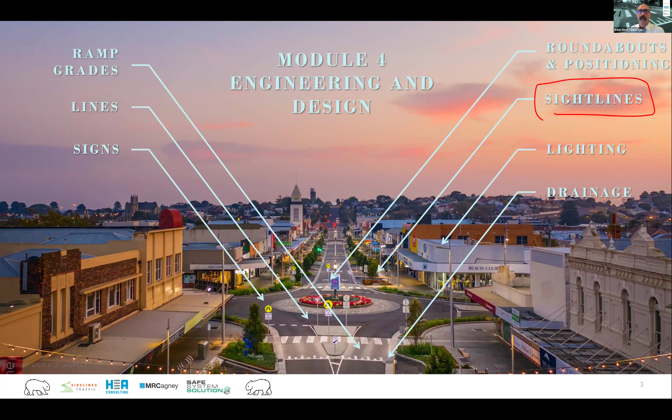Okay, design objectives. We have had wonderful presentations from Hafez, from Bridget, from Prue, that have covered off a lot of the design objectives. So I don't need to delve into that, but it just reminds you that we really need to be thinking about those desire lines for pedestrians, and cyclists as well. Cyclists will move a bit further off desire lines, but pedestrians are really adamant. That's where I want to go. I want to take the shortest and easiest route there.

And we need to design for that. Trying to corral pedestrians like sheep through areas not only is ineffective a lot of the time, it degrades the place value of an area, and also can increase risk. People get trapped on the road because there's a pedestrian fence or something like that. So really good crossings on desire lines, if you are providing specific crossings as opposed to creating whole shared zones or areas without vehicles.

We want to think about all users, and Bridget really delved into that in a lot of detail. We want to have high alignment with safe system principles, and Hafez set a wonderful foundation for that. I'll probably go into a little bit more specifics about some of that, but I think you've got a good foundation for that. And we want to consider this at a network level. Discontinuity through a travel path, one raised crossing and then coming to the next point where you have to cross and then having nothing there, it doesn't present that safe and connected route that we need to think about.

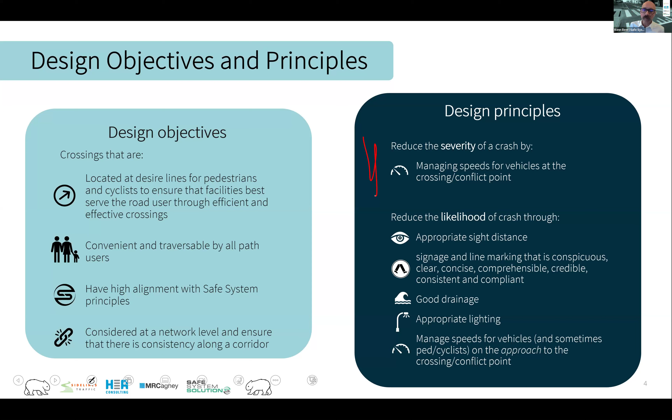So I'm going to start with sight distance. And I mentioned this one, I think is poorly understood, associated with raised crossings. This is one where traffic engineers and road designers are really great usually at doing this for vehicles at intersections. But how to think about it for pedestrians and cyclists crossing either with priority or without priority is not as well understood.

Okay, I'm seeing scary faces, Hafez. And that's good. I mean, it's kind of an obvious one, but we do see a little bit of this. There's a few things to it. Lots of scared people there. Okay, thank you. For those who are scratching their head a little bit and maybe just putting a scared face up because they saw lots of other people do it, let's unpack why we're not so happy with this. Well, there's some good things about it.

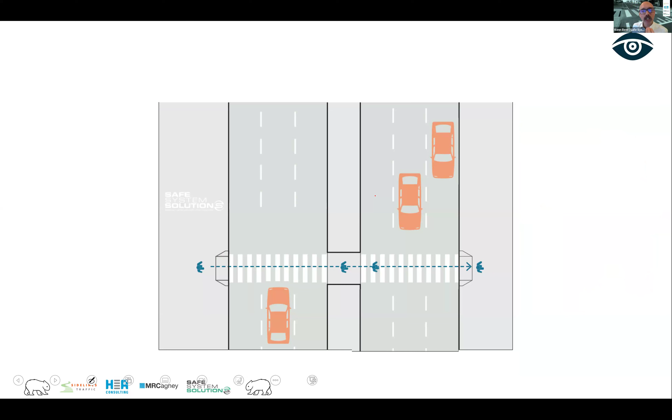I thought I'd use this diagram to explain why two lanes, or even three lanes, approaching a priority pedestrian or cyclist crossing is not ideal. I do this with a little diagram to show you what we call a dynamic visual obstruction, or a moving sightline impediment. It blocks that vision to something - in this case, it's blocking the vision to crossing pedestrians.

Now we have this nasty scenario, and we see this in different crash reports, or we've done some fatal investigations under not that dissimilar circumstances, where this driver is moving in at speed, this one's following just behind, this one slams their brakes on because a pedestrian's moving through quite quickly. This one doesn't have that, and we have that collision happen there. So that's something we're always aware of.

The Australian standard says no pedestrian crossings on two-lane roads. There's some work being done investigating, is that the case? What context are we talking about for that, and other bits and pieces. But let's have a look at a pedestrian crossing on a two-lane road here, which has got a different configuration.

But let's do some thumbs up, thumbs down on this. And Hafez, I see some things coming in there. Was there anything I needed to deal with at this stage?

Well, I think no, people talked about some of the pros and cons of the previous solution, and as you mentioned, we need to acknowledge the good work done, but we need to think about improvement as well. Yeah.

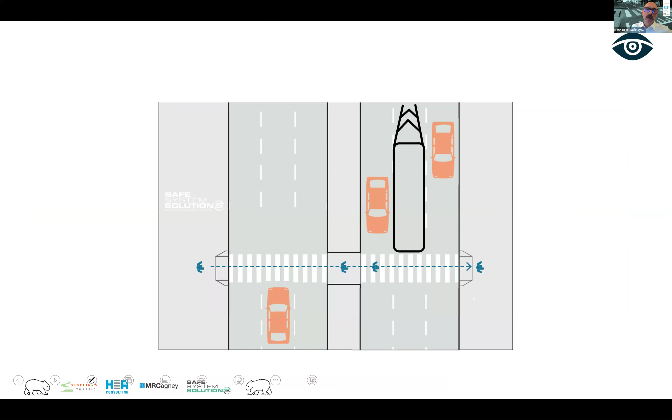Okay, let's talk about some parameters around sight distance at pedestrian crossings, raised crossings, or at grade crossings for that matter.

So the 1.2 meters a second is what we take as walking speed. However, I don't want you to just blindly take 1.2 meters a second on walking speed, because if it's a running track, or like a track that comes straight into the crossing, it's going to be faster than that. This is kind of thinking about pedestrians walking along a sidewalk, a footpath, and turning onto a crossing and the like.

1.6 meter setback is the sort of point we usually say we want to start that real vision to that pedestrian crossing. Now, that's for pedestrians. We'll talk about cyclists in a bit.

In terms of what eye height, we think about eye height for crossing points a lot. We use 1.07 - it's very, very specific. I think they could have just gone with 1, but that's okay. 1.07, and that's thinking about someone in a wheelchair and that eye height, a child as well.

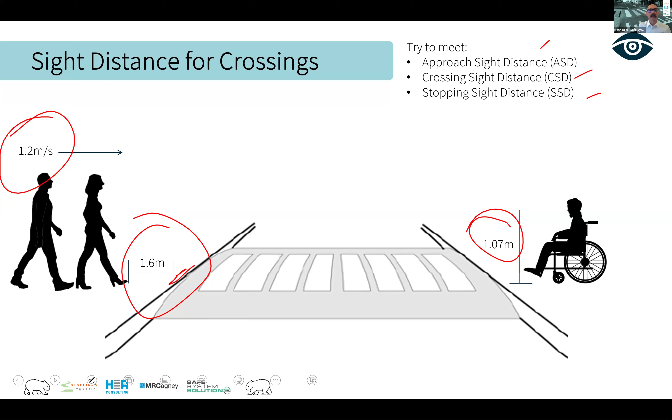A common mistake people make is to simply go to the road rules around parking restriction requirements and say, well, if I meet that, I assume sight distances will be enough. Now this doesn't work at both ends of the scale sometimes. Here I've put in the actual specifics out of the road rules - the Australian road rules, or the standard template road rules, each jurisdiction takes it, but they're all the same for this one. They talk about 20 meters before the crossing and 10 meters after. Now that has been put into road rules associated with sight lines, but it has no context to it whatsoever.

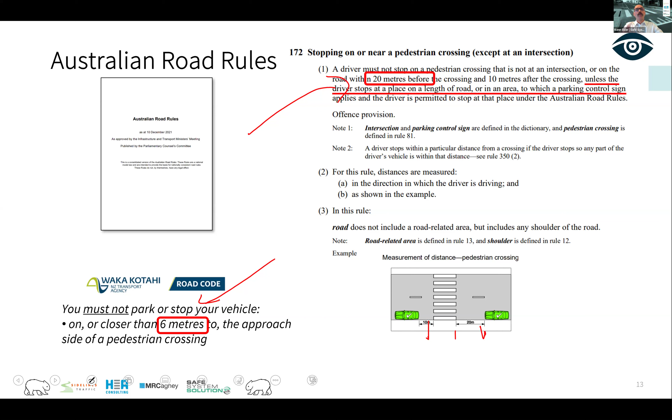New Zealand, for example, in the road code, has a 6 meter one on the approach. So people are making calls on this. But the reason I say this is in some situations, 20 meters is excessive. And if you rigidly stick to, we must get 20 meters here, you actually find that some councils and jurisdictions don't put in pedestrian crossings because they can't remove a car park for one reason or another. So that's not a good thing at all. The other scenario sometimes is the 20 meters is not enough and we're actually causing an issue. So you need to say, okay, that's part of road rule requirements, but we need to understand the principles of this and make our call based on that.

Now, approach sight distance, ASD, is the ability for a driver to see the pavement, the point we need them to. We use approach sight distance for vehicles on the approach to intersections that have to give way or the like, but you use this and you want that driver to be able to see that there is a crossing there. We want them to be able to see the pavement of that crossing. And it's important, the pavement, because if we're thinking about vertical grades, coming over something or the like, we need to be conscious of this.

And you can see there that we've got reaction time as one of the elements to this - that is, how long does it take that driver to realize they got to do something and then lift their foot off the accelerator and put it on the brake. That's reaction time. So we use different times based on the driving environment. On country roads, like driving the Pacific Highway, we have a longer reaction time because people are just sort of cruising and driving. In city spaces, with lots going on, their reaction time is down because they're really part of the driving task at that stage.

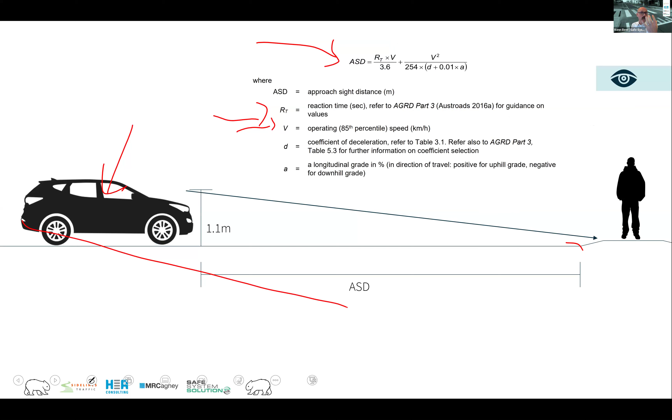Now, Austroads has, in recent times, done something I'm not happy with, and I've told them about that, and they have promised me they are changing it in the next round of the Guide to Road Design, which they're working on. We've had Queensland either come out with or about to come out with the same conclusion that I made, which is this is ridiculous. But I'm going to tell you what it is, and then I'm going to tell you the other way we need to think about it.

Crossing sight distance, CSD, is essentially saying this pedestrian needs to be able to look up there, see a vehicle, and have enough time to make it across the crossing before the vehicle arrives.

Now, the reason we have in the past not used crossing sight distance for pedestrian priority crossings is because who cares how long it takes a pedestrian to get across there? They have priority. It doesn't matter if that's 5 meters or 50 meters. It should not matter.

Austroads' justification on this was that it is a safer situation if we've got crossing sight distance rather than stopping sight distance, which is the next one we'll talk about, because crossing sight distance is going to be longer. This means we'll have this bigger sight line open, a big sight triangle open.

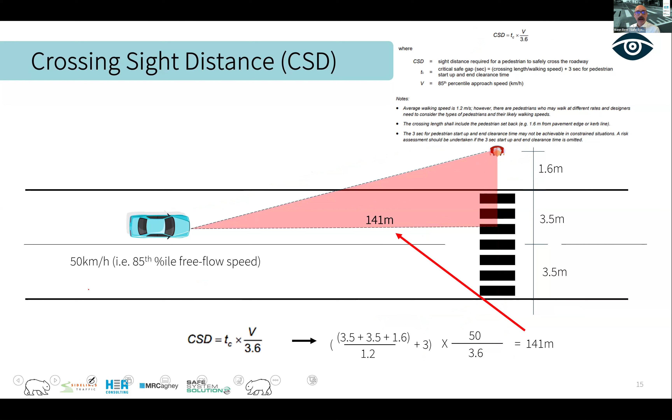Okay, so you calculate that all out, and you get this sort of 141 meter sight distance. So it's huge. Now that's admittedly at a 50-kilometer per hour 85th percentile, but that's what it is. Okay, but if we raise the crossing, what happens?

If we raise the crossing, then what happens? Well, vehicles get in a very different mindset. There is a physical object to now go over. Thus, we get lots of different advantages.

And actually what will happen is the driver will approach the crossing. It doesn't matter if they've seen or not seen a pedestrian - their foot leaves the accelerator and goes onto the brake because they have to navigate over this raised thing, and they slow on the approach to it. That's important. So there is occasionally this misconception that it slows them down somehow. No - they see it, they slow down because they've got to navigate over this thing.

But what we get there then is this interesting thing where they're traveling along at free flow 85th percentile speed, say that's 50. We've designed the crossing with ramp grades to get a 25-kilometer per hour speed over it, for example, and I'll talk to you about how you make those choices and get to those numbers in a bit. But do we then say, okay, let's take this 25 as our 85th percentile speed, or do we still use the 50 as the 85th percentile speed?

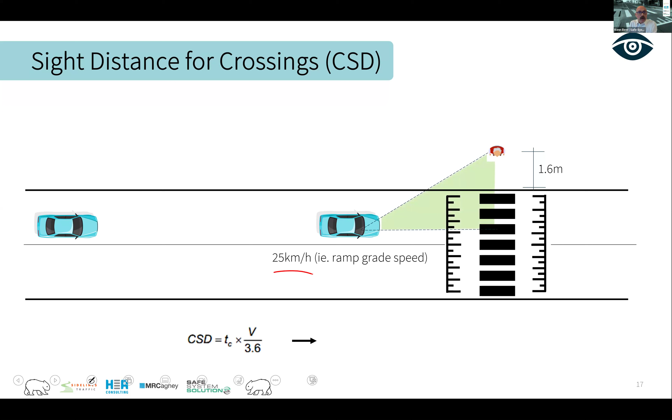This one is going to be much shorter, isn't it? Because we've taken a lower speed. And you can calculate that one out and you get 71 meters in this scenario. I still think that's excessive, by the way, but that's much lower - it's half of what we were talking about before.

So you can see there is an immediate advantage in raising a crossing. Like, before we get into all the safety benefits of raising a crossing, you actually narrow down your sightline possibilities, so that your absolute minimums are going to be far less, which means that if you're constrained with car parking or other things, raising the crossing just becomes a very logical thing to do to improve your sightlines.

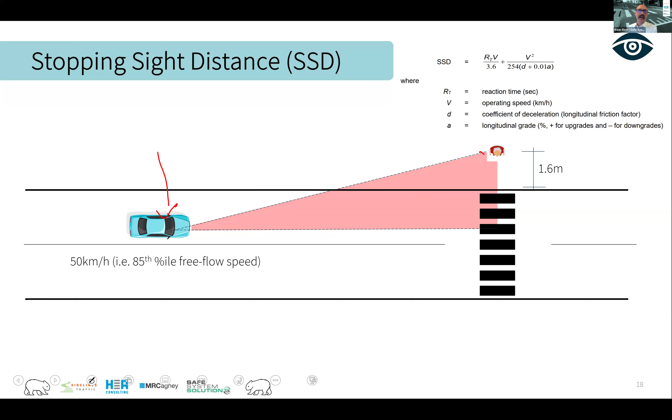Stopping sight distance is actually now for the driver to see the pedestrian at 1.6 meters back and have time to react, lift their foot up, brake, because they realize they're going to have to give way here. That is how sight distance at a crossing should be done, and Austroads will move back to something like this in their next iteration, they promise me.

Because if we run that calculation, we see that same 85th percentile speed is down at 48. That's more like if you actually get out there, measure them, drive them, walk them - this is more appropriate for crossing points. I'm slightly uncomfortable with non-raised crossings with this. So in one sense, raising the crossing just makes all of this far better. But that's stopping sight distance at that number.

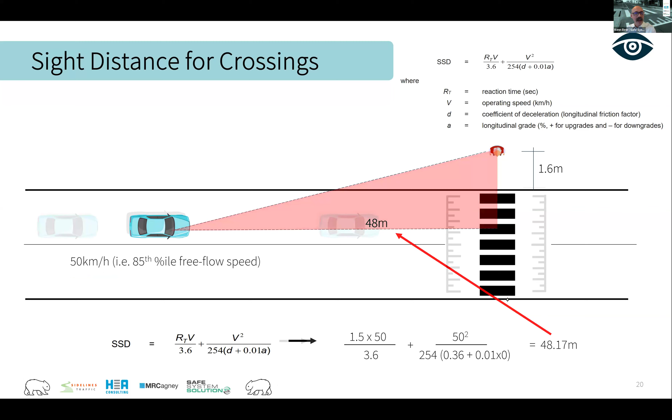Now let's go back - we're still on stopping sight distance here, but I want to explain to you the principles of how this works. We've got stopping sight distance would be 17 when we've raised the crossing. Now that's really quite low.

What actually happens in this scenario is a driver's driving along, say at 50, that's their cruising speed. They're going to hit this ASD point, which is where they can see the crossing. Then they react, lift their foot up, and start their braking scenario. Then they slow, and this does not matter if they are able to see the pedestrian or not - they're going to go through this slowing.

Then there's this critical point. The critical point is where they make that decision: do I continue to brake to a stop, or do I take my foot off the brake and put it back on the accelerator to go over the crossing? So that's your critical point there.

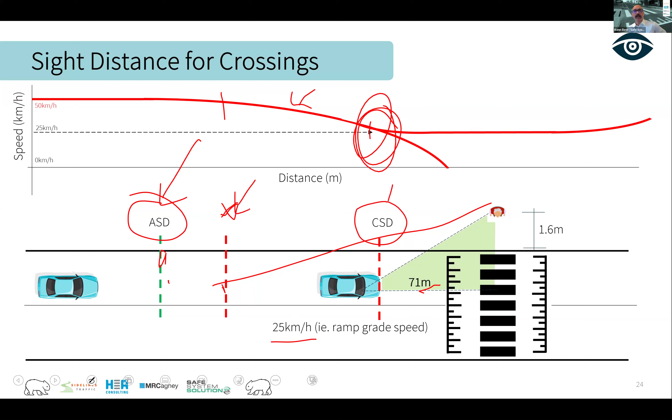So the reality is this is top end design requirements. You need to meet ASD to make sure they know there's a crossing coming up. But do you take the lowest, which is the ramp grade speed, or the free flow 85th percentile speed as the point you draw your sight triangle from? It's somewhere in between those. Think of those as the bookends of your sight distance triangles. In constrained scenarios you might come down all the way to this, and if you've got more space you'll be opening up to this. There'll be a significant difference in these.

Now, where I'm not comfortable going, and in one sense you could theorize this should be the case, is maneuvering sight distance - or gap sight distance, I should say, which is essentially what you'd be doing if you assume every vehicle comes to a stop at a pedestrian crossing. Now, they don't do that - that's just the reality of it. So we will jump past that one.

Now, question for the group - I see some stuff already coming in, which is great, Hafez. If we've got this road and unfortunately can't quite meet our sight distance requirements, either CSD or SSD depending on where Austroads has finally got to, either way, what are some things we might be able to do if we can't quite meet that? What design changes could we make to get us closer to our calculated sight distance requirements?

Any ideas there? And maybe while people pop them in, Hafez, you can tell me. For sure. And then there will be a prize here - the best answer gets a prize. Oh, I like it, I might give out a few depending on how we go. Yes.

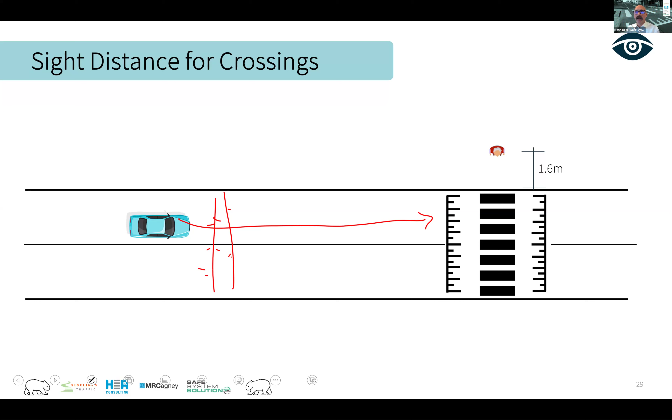Ken has come up with curb extensions. Ken can get a prize for that. Everybody's actually coming up with really good things there, but I think curb extensions is a really important one for us to think about because it just opens sight lines up really well. So curb outstands, curb extensions give us that nice, better sight line there, and you'll have a significant difference.

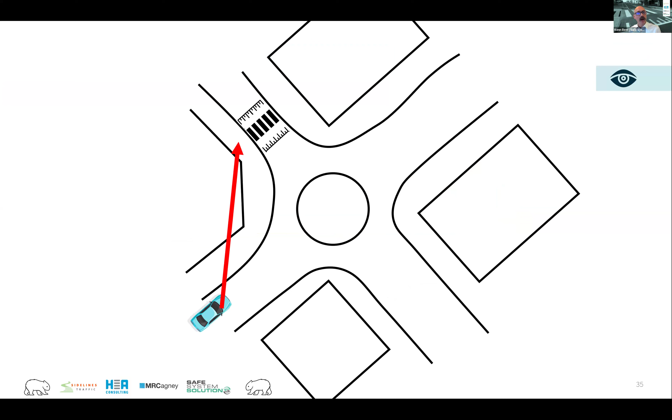Now you want to think about the 85th percentile speed of a vehicle going through the roundabout. Don't take your free flow 85th percentile speed somewhere back here, because that's not relevant when they're in the roundabout slowed down. But one little addition here - okay, they can meet ASD, so that's good. They know there's a crossing, so they're going to be going slower. But if we're able to add raised crossings at these different points, we're ensuring that lowered speed at that critical point. We open up these sight lines.

Ken? Emily has raised this question a couple of times now - I sort of identify with that. Some of the curb outstand, curb extension, some of the facilities for pedestrians interfere with cycling movement and cycle lanes. What are your thoughts on that?

Yeah, that is a legitimate challenge. So an on-road bike often gets squeezed, or can get squeezed, in with vehicles going through, as with the curb outstand. And so you're in these awkward situations. There are designs with cyclist bypass facilities - you need to design them carefully to ensure that cyclists and pedestrians aren't having major conflict issues, but you can sort of pop cyclists essentially behind, a little bit sort of floating bus stop style, but in a slightly different scenario. So there are options there. If you've got the road width, though, you can still provide facilities. I've got some pictures coming up later of where the cycle facility still remains and it's got curb outstands.

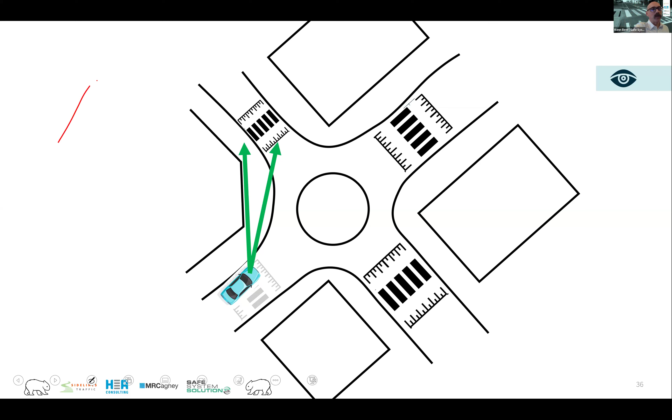And I saw Peter's question there - what's a sharrow? Here's my bike.

So it's a line marking on the road that kind of looks like that. Actually, it's a lot better than that, though. It's just pavement markings to indicate that a bike will be sort of taking the lane at that point. All right, let's have a look at this one.

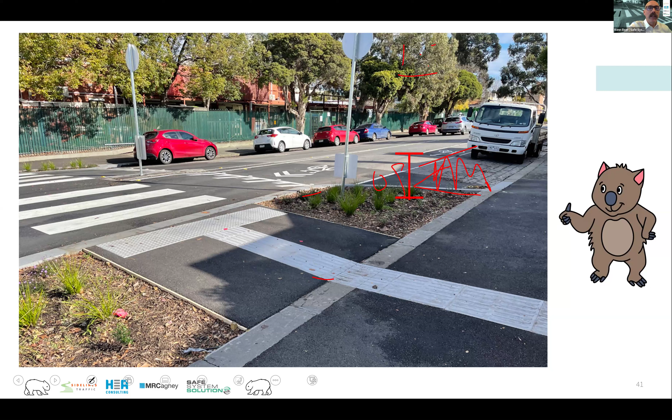But what we want to really ensure is that we have this 0.5 to 1.5 metre zone, ensuring that we have that as a clear window to be able for drivers to see, but also pedestrians to see out.

Now, if you followed the absolute specifics of the guideline, you'd go to 1.07, because remember I showed the wheelchair person and their eye height was at 1.07. But that doesn't make sense. That's thinking about a pedestrian at a non-priority crossing, not a priority crossing, being able to look and pick a gap to scurry across the road. But if you're thinking about a driver approaching, all they're going to see is the top of somebody's head, and that's insufficient.

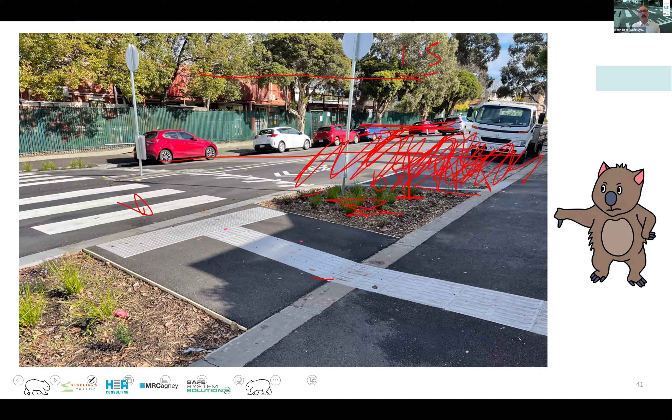So we go down to 0.5 to 1.5 to ensure we've got that low ground cover, ideally. This is a nice example from lovely Warrnambool, where they've done amazing stuff in the CBD with raised crossings around the roundabout, making it really pedestrian friendly and low speed. Nicely done, with beautiful ground cover, but kept low.

The other thing I'll point out, and we've probably got accessibility experts in the group who can talk more about this - I really like that they've provided this hatched area here, because if you put an angle park right up to a pedestrian crossing, people back out over the crossing, which isn't ideal. This means they'll back out into that position instead. They've also got the disabled park there. Somebody mentioned that's the incorrect side for that - I'm not 100% sure, accessibility experts can fill me in on whether that's compliant. But the idea of not having somebody back over a crossing to exit their car park is an important one.

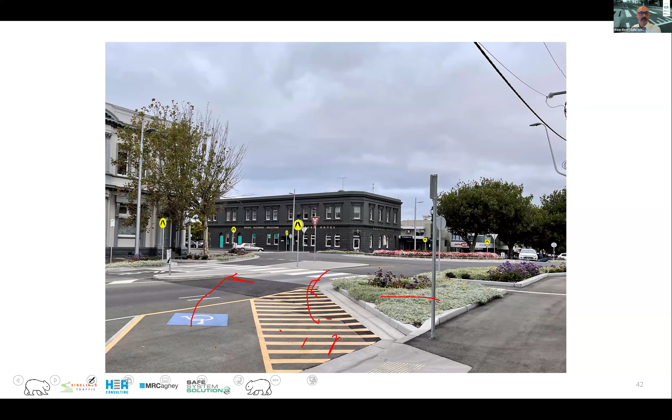Now, what are we, sort of 15 minutes from a break, Hafez? Is that right? Okay, right. I've been talking about...

Pedestrians, 1.2 meters a second walking speed generally we're taking with priority crossing. But what about if a bike has priority crossing? What speed would we use for a bike rider coming in? Because a driver has to be able to see this bike rider and make a call associated with that, and that's determined by the bike rider speed and the vehicle speed. So for bikes, we take a 1.4 meter height when thinking around it. We've got some guesses in on the speed.

Let's give out some prizes - if anybody guessed a speed, they get a prize just for getting involved. There's different speeds from different sources, some nice research I've referenced showing different ones for uphills and downhills, males and females. TMR in Queensland talks about 15 to 25, a 4.1 to 6.9 range, which is in the range people were guessing, which is good. So that gives you a general idea of some of the parameters.

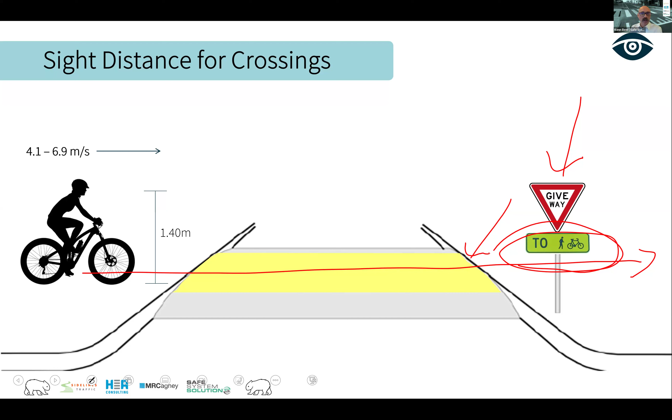So some jurisdictions allow riding on the footpath and riding over pedestrian crossings. So for people saying they may not have seen that before, the case could be that you're allowed to ride in these circumstances. But a lot of jurisdictions are going down this yellow crossing, marked like a road perspective.

There is the other alternate option, which is to provide your cycling facility next to your pedestrian crossing. You can see a couple of them here. We would mark that as the pedestrian crossing. You'd actually technically need to mark it with a give way as well in order to prioritize that cycle way through there. You're getting excessive signage in these circumstances.

People recognize that. But in these scenarios, I want you to ensure that you're getting sight triangles, sight distance to the cyclists. They're going to be the ones that are the most critical because they're moving faster.

So let's have a look at one of these yellow crossings, and you can see that in this scenario, the rider, which is actually me. If you look out here, you're seeing this car, and they come into view there, and they should have enough time to see me and to stop and brake.

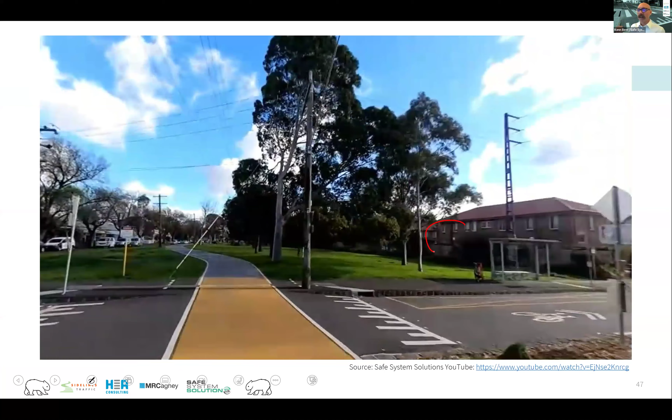But under these scenarios, we actually want to provide enough distance, sightline, for me as the rider to slam on the brakes if that car looks like they have no intention of stopping.

Okay, now there's lots of different guidance out there. I think in this case, the Victorian government has done a really wonderful job in the design principles for raised priority crossings, especially around how they've dealt with sightlines. It's a good document, and I've put a copy into the learning management system for you, but you can certainly just Google this and find it.

But I'm going to take you through the process for looking at sightlines for these priority crossings under this guidance. Some jurisdictions have no guidance whatsoever on this, so it would be appropriate to use this. I'll show you TMR's got a little bit of unclear guidance around exactly what they're thinking on this as well, which would be less than this. Okay, I'll do this, and then I'm going to let you have a quick grab of a coffee or something like that.

So, safe intersection sight distance - we hadn't talked about that one specifically. That is SSD, stopping sight distance, with some slightly different heights you're looking at. So the formulas are the same. But because we're saying okay, this is kind of an intersection, we're going to think about it in that context.

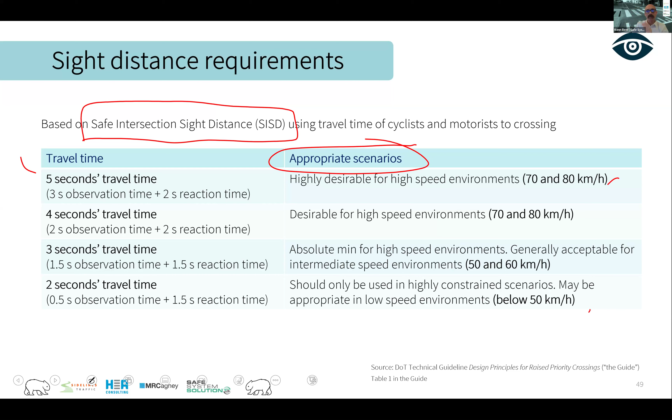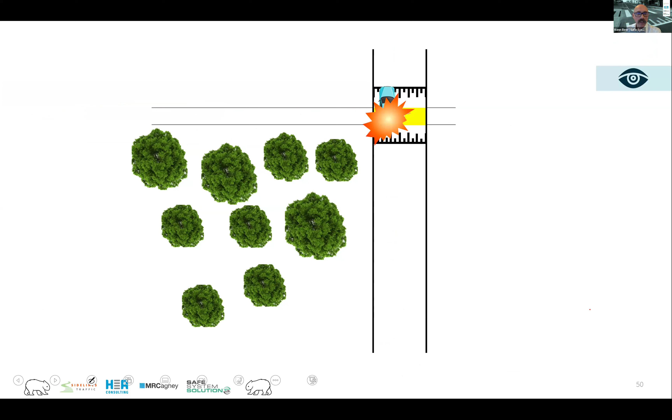So what we're talking about here is we have no sight distance there, and we see the car doesn't have enough time to stop, and even though they slowed down, there's been a collision. If we open up sight lines there, at some point we will have the ability then for the car to come in and the bike goes through, the car saw them in time, slowed down, let them go through. But we also want to try to provide this scenario, which is where the car didn't quite stop, I'm going through, but the bike slams on their brakes because they've realized they're going too fast. So we're providing that genuine multi-sight triangle in these scenarios.

The configurations come in 3 different scenarios that you can analyze out there. Scenario one is like a very square crossing, like the one I showed. But often we have this shared path or cycleway running parallel with a major road.

That's a really good way to do it, especially with major projects about traffic congestion, widening or duplicating a road. They want to pump more vehicles through it. This is our opportunity to ensure we're providing dedicated facilities for pedestrians and cyclists, and we can leverage off that. So we create this running parallel within the road reserve, within the right-of-way. We have this dedicated facility.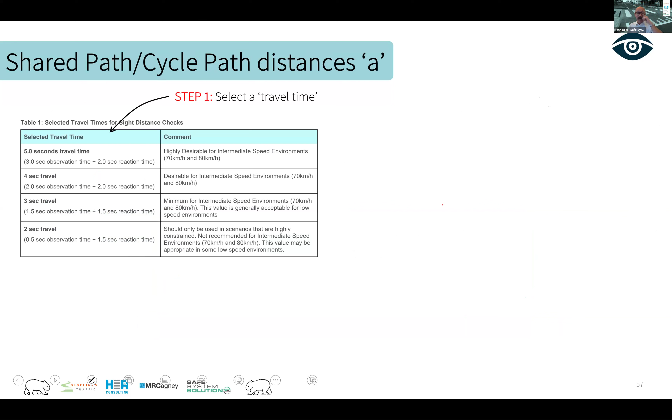So there's your 3 scenarios to work through. You use the same formulas, just thinking about different specifics. To calculate distance A, the bike setback, we think about our speed scenario - the travel time scenario, land use scenario. So we pick one of those: is it a lower speed environment, and we can take a low travel time speed?

Then we move to our choice on the speed of the cyclist - I talked about that, 30 km/h for a cycleway, they're hammering through there. Down to 15 where cyclists are really navigating around this area. What we do then is look for A, basing it on what we've chosen as a cycle speed and the road environment, and then find your corresponding distance for A.

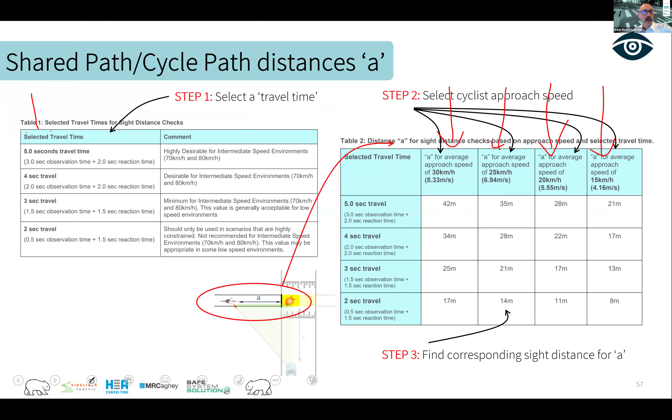The distance for B uses the same principles, and we're talking about the main road operating speed here. This could be an 80 km/h road - they're hammering along, they've got to slow down and make their turn. How far back do we need to make sure they can see cyclists? We use the same thing: we go 80, and then the travel time choice from table 1, and you pick your corresponding travel time, for example.

And then C is similar. So you can see here a quick table on this. If we've taken a 20 km shared use path, as somebody did nicely earlier on, and we've decided on a 3-second travel time requirement, and there's a 50 km/h operating speed of vehicles, you can see we want to provide 17 meters for A and 21 meters for C.

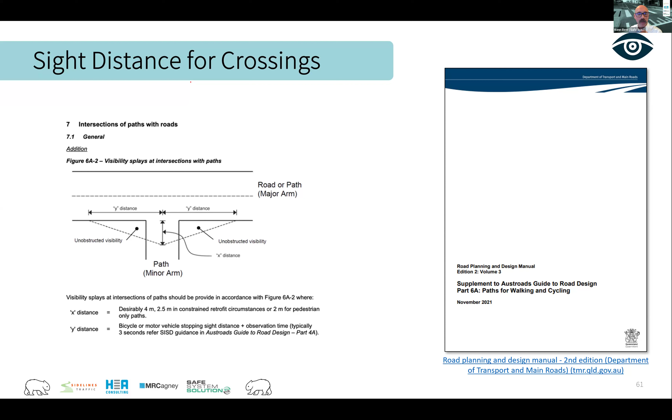Okay, I'm going to keep going, but we've come up with some calculations on these sight distances and the like, and I'm just going to jump in here and show you the TMR supplement to 6A, Paths for Walking and Cycling. Have a look at that with some of those slightly different scenarios, I talk about a 4 meter setback there, not quite the same exact scenarios, but that's your reference document if you're in Queensland, taking into account the principles we talked about.

But my question here is, what if you cannot get those sight triangles? We talked a little bit about this for pedestrian crossings. I'm now in the shared path or cycleway crossing scenario. Is it just all the same things, or is there anything else that anybody can think of? Let's see if anybody pops something into the chat there as we get back into it after our little break. Any ideas, people? What can we do if we can't meet the sightline requirements on the approach to a shared path crossing?

Cool, okay, now we're getting some good answers coming in, aren't we? What do we got there? Tom's saying, again, you might want to start questioning the crossing control. And we've got traffic calming, so make them stop and see. I assume we're talking there about the bike, so we would be talking about changed priority there, or we might be even talking about making the vehicle stop and see, which is another option. Oh good, lots of great stuff coming in.

Fez, I'll let you decide who gets prizes here because this is all good. I've popped a few in, I think some others people are popping in could be added as well. Speed management for the cars.

Okay, so let's talk about positioning of raised crossings around roundabouts. I talked a little bit about that. Really, you've got two options here. One option is to have your crossing right up at the hold line, as you can see in this one - right up at the hold line you've got the raised crossing. The second option is to sort of set it back maybe 4 or 5 to 8 meters, as you can see here.

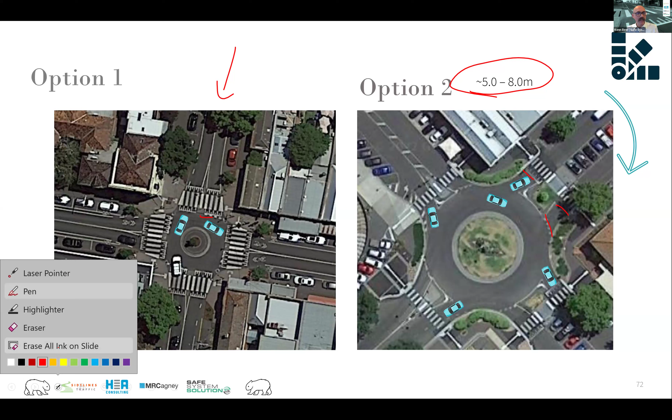You've got that buffer. The scenario I've laid on there is around vehicles entering into the roundabout. In this scenario, we have vehicles that are waiting for pedestrians and they're clogging the circulating carriageway. Personally, I don't care, and the reason is that this is obviously a high pedestrian priority area - moving vehicles through there at speed is not the purpose of that area. Yes, this scenario means they'll be able to wait there and still circulate around, so it's a bit more efficient for traffic flow. But actually, the reason I prefer number two is not to do with that.

It's actually to do with vehicles entering the roundabout. If they are waiting for their opportunity to come in, under this scenario they sit right over the pedestrian crossing. It's not the most risky thing, but we do have pedestrians walking around, going down, up, and certainly mobility challenged pedestrians are very much stuck there waiting. So that's the reason I say this is the preferred option, because we have that area where most vehicles can just prop out of the way. The next vehicle will prop back, and there's that clear pathway for pedestrians to cross.

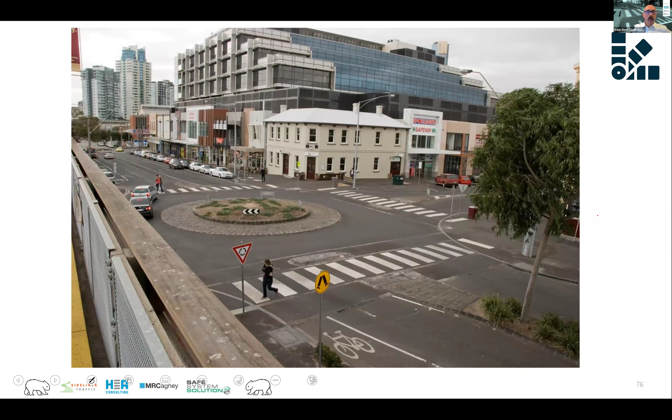Okay, the next thing I want to briefly mention is the angle of approach on any raised feature on the network. We really want to try and provide that perpendicular right angle, so any larger vehicle navigating over this doesn't hit it with one wheel first, go up, and get that rocking destabilization. That's our objective, and that's why we try to keep everything as square as we possibly can.

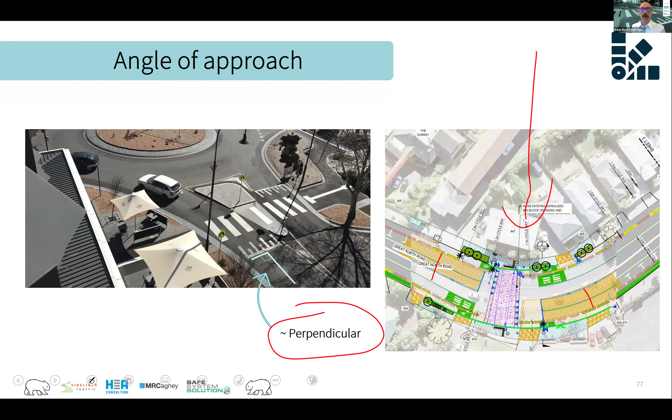So the ideas in there are good. Either we're going to try and slow vehicles back here where it's perpendicular to travel, or we alter things. So one proposal was a flared crossing, which is fine. The raised part doesn't need to run exactly parallel with the crossing lines. So that's a possibility, or something setting it back, bringing it back, or particular raised points there.

The principle, again, think about the principle. The principle is to lower speeds at the conflict point. Make sure vehicles are going at low speed where they're about to hit a pedestrian. Try and do it on as much of a perpendicular angle as you can.

Positioning at roundabouts, again, different guidance. The Victorian guidance on bicycle and pedestrian treatments at roundabouts is a reasonable document. It's getting a little long in the tooth now, but still some good stuff in there. TMR's got some good stuff too, but you have to jump between 4 documents to get it all. I've put those 4 in the notes so you can jump in and have a look yourself.

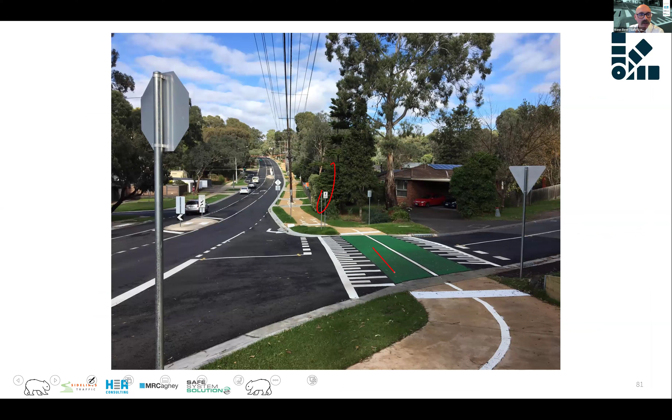Another example here. This one you see is a cycleway, although is it marked as a shared path? It is marked as a shared path, so technically that should be yellow. You can see the setback is going to be good for vehicles exiting and entering. There you go, I drive a little car in there. You can see they're propped out of the way. If they're doing that right turn in, they can pause and not be impacted by vehicles coming this way. So it's a nice little buffer area.

All right, ramp grades, how are we going? I'm going to have to move a bit quicker here. There's Fez and I out there measuring some ramp grades down in Caulfield. That was good. But here's the basic principles: the harsher the ramp, the more people slow down for it. Because they sit - harsh ramp, slower speed; gentle ramp, faster speed. Pretty obvious, but as I said before, important thing to remember is they're making their decision back here.

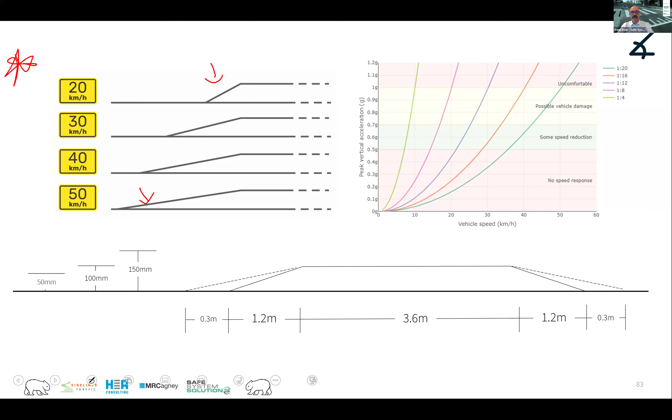They don't hit it and then make a decision on the speed to go through. They make a call based on what they can see, what they're perceiving, what the advisory speed says, and importantly, their history of driving that point, because most drivers have driven this road before - the bulk of drivers. If we've signed something very shallow, easily shallow down at 25, it may be the first time they do it they'll go down to 25. Certainly not the next time.

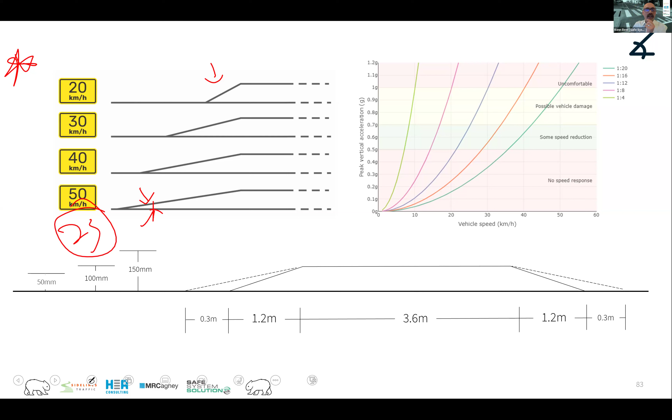So what we talk about there is ramp grades, and we talk about it in a 1 in something. So here we've got a 100 mil high ramp, 100 mil high platform, 1.2 meter length. Quick prize for the person who can tell me what's the ramp grade there - pop that into the chat. A 3.6 meter length of platform. This is a very standard raised crossing.

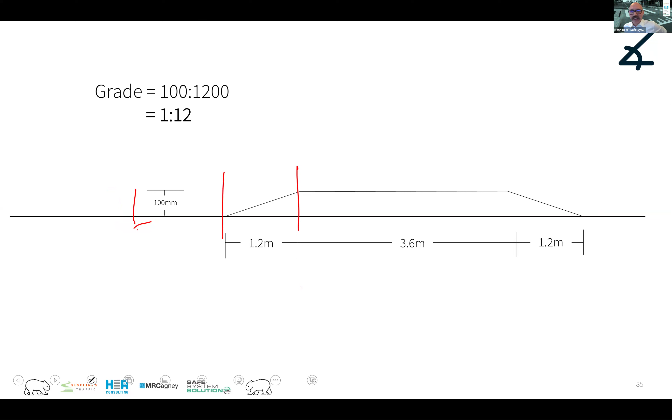Who got 1 to 12 first there? Andrew. Andrew got it, Gold Coast Legends. So that's going up 100 and out 1200, right? So that's what we talk about with ramp grade there. Tough field, yeah. But I want you to remember ramp grade is relative to the longitudinal grade of the road, so you've got to keep that in mind.

Here's a wonderful graph, CDM research graph, and it's certainly used by a lot of the decision making. We've got different ramp grades here, and vertical acceleration - that's how much up and down the driver's going to get. No speed response for this area. Now, uncomfortable is an understatement here - this is almost really bad, possible vehicle damage, you can see it sits under that. This is where we want to be. This is where it will play out, what they will settle themselves very quickly at in terms of the speed they travel through these crossings.

So what you do is work out what you're looking for, and you can get a ramp grade accordingly. So 1 in 12, we can see is going to take that trajectory, isn't it? And we can say there, okay, we're going to get somewhere in the 23, 24-ish, 25-ish range. So it gives you that nice ability to understand what speed we're going to get through based on the ramp grade.

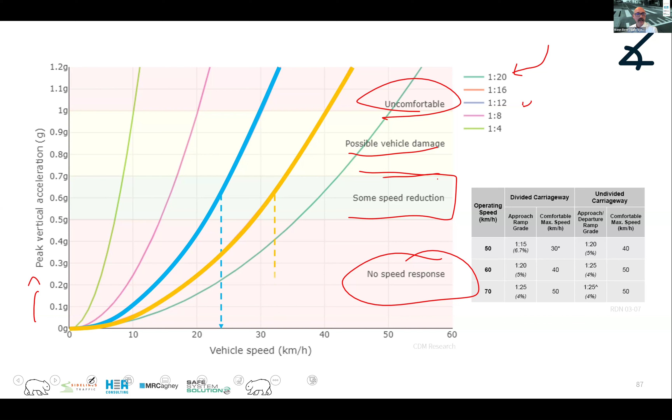If we took 1 in 16, we'd be thinking, okay, it'll be a little bit above 30.

Now, lots of different things in different guides and points about it. So I've just listed all this, the Austroads stuff, the Australian standard stuff, talking about heights, lengths, and the like. That's in your notes for reference if you want to dig into these in more detail. I'll put the TMR stuff, the Waka Kotahi NZTA stuff in there as well for you. So I've just dot pointed all of these references. They generally, there's a general consistency, but a few anomalies within there.

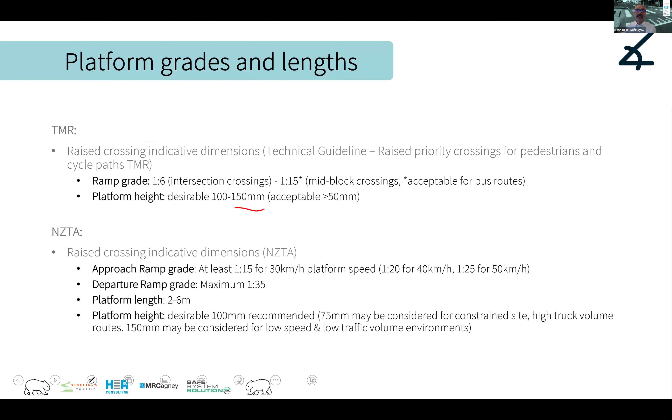It's quite blow my mind - a 150 mil high one that's high. I'd be really interested to see actually some of those out there in different road environments.

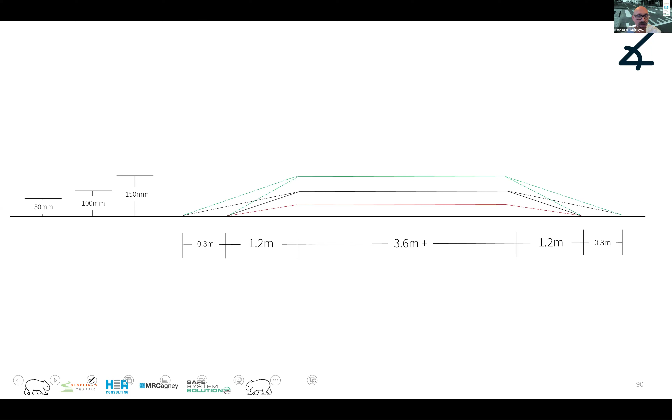But let me explain why that is. You've got a 100 mil, which is a pretty stock standard height. You could lengthen your ramps as one thing. You could raise it, as we talked about, and you could vary the length raising it. So these are going to change all of the ramp grades. You could have lower ones with different ramp grades.

But what we're thinking about is: is a car going to hit its front end as it comes in? Is it going to bottom out as it goes over the top? Is its tail overhang going to scrape as it comes down? So they're all factors of consideration that we take into account.

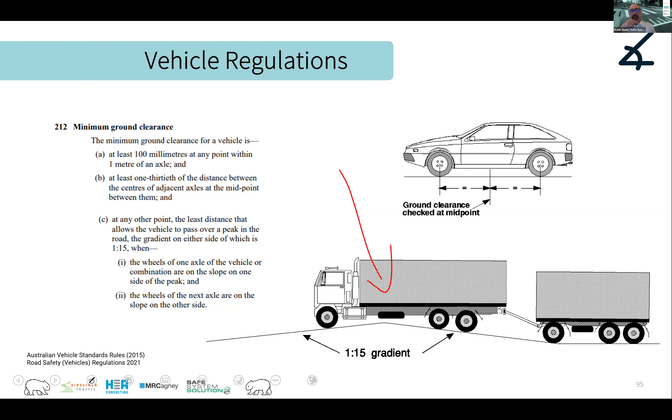Usually cars perform pretty okay in most of them. What we often really need to think about are our larger vehicles and their clearance. Now, we know vehicle regulation, ADRs, and they're based on us understanding some specifics around a vehicle.

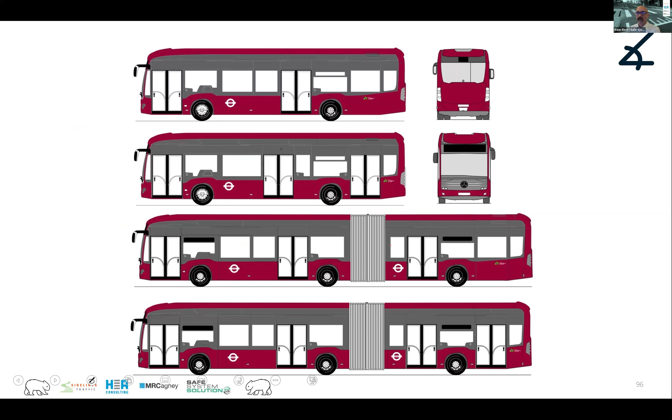Buses become a very important one and something that people get very concerned about. And I often see people deciding, no, we can't do a raised crossing because it's on a bus route. No, that's not true. You might need to design it slightly differently, but you certainly can do raised crossings on bus routes in every jurisdiction.

Let me talk you through the buses though. And this actually links with the heavy vehicle diagram I had before that I didn't spend any time on. What we're thinking about are the distance between axles and the maximum percentage of grade that can be taken. And then you see it's a similar one at the back here.

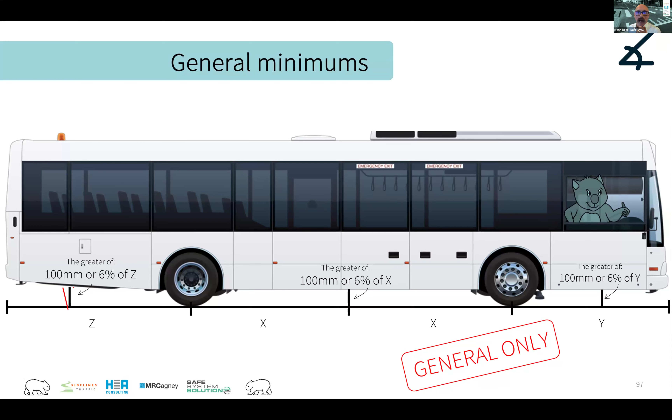Often buses will sit up, taper up on the back as they do. So if you took a standard bus length, 12.5, they usually have that 190 clearance. These are some New South Wales specific diagrams, but you see angle approaches and front clearances are important. And you've got wheelbase as another important one.

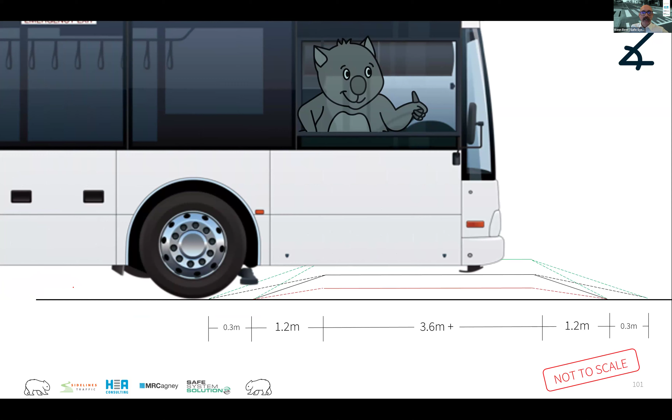We can think about long rigids. We can think about articulated buses and their ability to tweak. But essentially, if we take some of the worst bus scenarios being a coach - your public buses are usually higher, but your coaches, that 150 mil, it's actually going to strike it coming into it. The 100 mil, it's just on that point. The bus will be able to get over that. It will bottom out over the 150. It'll be okay under the 100, and it'll bottom out again over a 150.

So there's more information from the National Heavy Vehicle Regulator on more of the specifics of buses. You can get a huge amount of information on that. But here's a picture of a coach back at that crossing I was pointing out before.

You can see a coach there on a 100 mil high, 1 in 15 ramp grade. It navigates it fine, right? Yes, it slows itself down so it doesn't bounce over it, because it's pretty close to touching it, but it gets through it fine. And that's an absolutely acceptable ramp grade and height. It's a very standard raised crossing.

That's acceptable on routes that are going to get buses, but not your every 10-minute commuter bus route - it's going to be a significant impact if it's that many of them. You can see the commuter buses, though, they tend to have more clearance and they're able to get a little bit more out of that.

The 75 mil high and the 1 in 20 ramp grade. So it's flattened it a little bit. You start to lose a little bit of the speed calming of the vehicles, but you're accommodating the buses quite nicely. This is a nice setup.

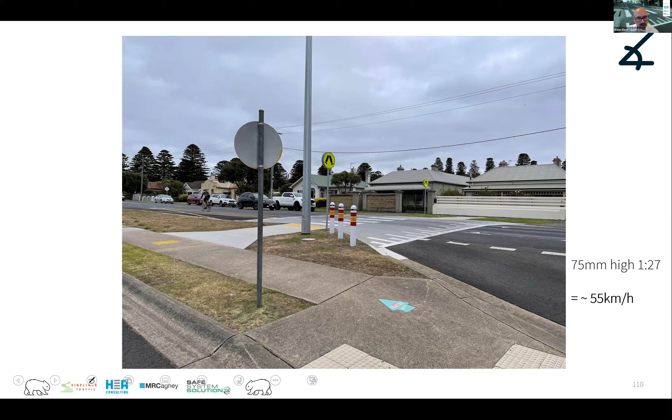To me, that is far too shallow. This one is really great for your bus routes.

If you find yourself in that scenario where absolutely not, we can't do this, there is still the ability to slow vehicles down on the approach to the conflict points with speed cushions, so buses can straddle these. It's going to have no impact on the buses in terms of their vertical deflection, up and down. They will probably slow down a bit as well, which is good, but certainly vehicles will likely slow down on the approach. Make sure you do them on both sides of the road, unless you've got a big longitudinal separator, because if you just do it on one side, vehicles drive around them. But that's a reasonable setup as well. It's a much lower cost way of getting that principle of controlling speeds at the pedestrian crossing point.

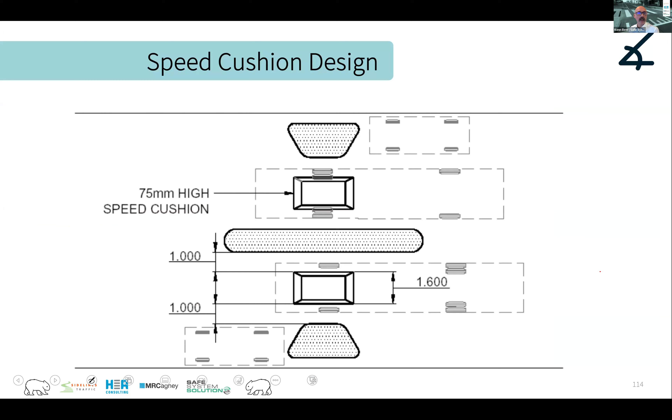In terms of speed cushion design, they're 75 mil. You can see there the wheelbase straddling that you want for ensuring that the coaches and the larger vehicles and the buses just straddle it between their wheels.

Ken? Yeah. A comment question in the chat room about SUVs and the change in the fleet and the impact on the design.

Yeah, I mean, it's a constant battle trying to do this and keep up with the changing vehicles. Not just from a raised crossing perspective, across the entire board. We saw the changes in barrier configuration requirements with the introduction of MASH to try to cater for the higher vehicles. Now you start to see much heavier vehicles coming in with electric vehicles, and now we're thinking, oh God, we need to change this again for barrier systems. We see the same for raised crossings and different calming facilities. We came up with a lot of that for normal standard 1980s, 70s, 90s vehicles, and now we're into these higher vehicles and suspension.

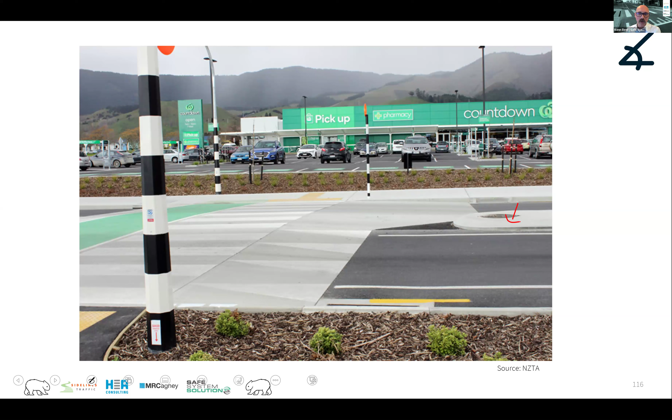Picture here from Waka Kotahi associated with the fact that you don't need your exit ramp grades to be the same as your entry ramp grades. A critical aspect is usually that you have a separator between those two, because you don't want a flatter ramp grade and a harsher one. If a vehicle is slightly out of their lane, they really would get a destabilizing effect. So you can do this, and that can again provide you with just a much gentler exit for some of those vehicles.

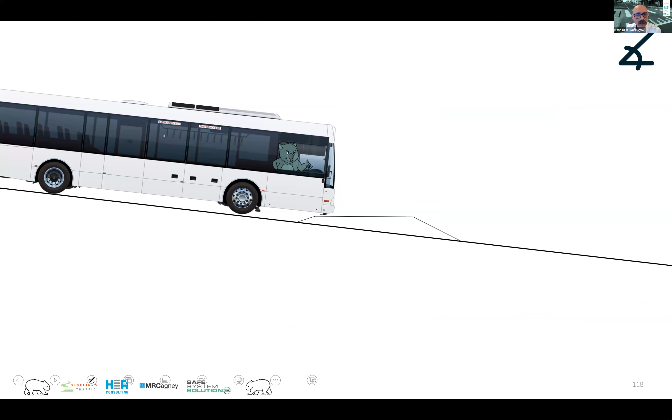So there you go. You can see that we have configured this one to be nice for a person crossing this. However, you can see immediately that our bus is going to have trouble, isn't it? It's going to have trouble as it enters that, and it's going to get stuck on it. It's just far too high in order to keep that level. So we can sort of play with our configuration there and lengthen it to try to still get that visual speed reduction for the approaching vehicle, but to be able to cater for these larger vehicles.

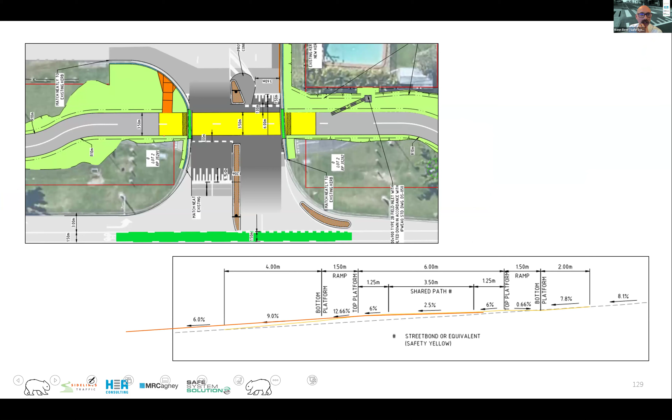Now, in some of these, you get some pretty long pavement raises and the like, but certainly there is the possibility to do it if you need to. So this one could just possibly work, but you'd really need to lengthen out the taper there. There is the possibility, though, just to put a speed cushion there on the approach, which would do a lot of the work we're trying to do. It would also probably help you with your drainage significantly as well. So there is the possibility.

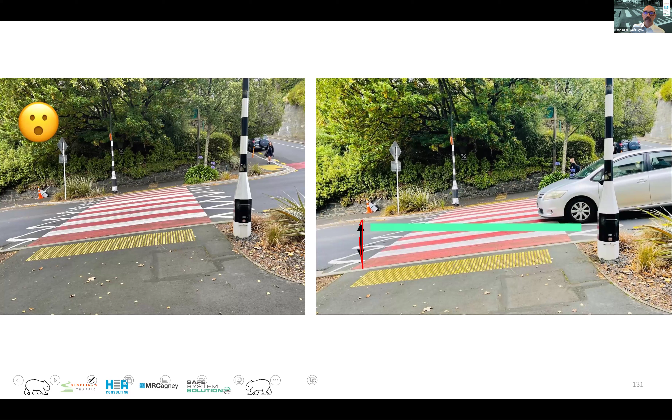The emergency vehicle topic that we talked about a little bit, I just put that link to that article, and I think it's a beauty: emergency responders told us raised crosswalks had no effect on their response times, and they actually prevented incidents the responders would have had to respond to. What a beautiful statement. I think that's a really good one from the Federal Highways.

We do have a fact sheet, which I can bring up shortly, on the Safe System Solutions website around raised crossings that also points at some of the emergency vehicle considerations, but more from a principles perspective, which is essentially to say, do emergency vehicles slow at different points on the road network? Absolutely. Certainly going through a signalized intersection, a roundabout, and these features, they slow. They have to, and they do, and they're happy to do that. And really, raised crossings aren't going to have major impacts on their travel time.

So there's been discussion around 3D crossings and the like. I mean, you remember I said, Hafez, that vehicle drivers, most of them have driven that area before. And what we see with these, it's funny, like 20 years ago we trialed this in Rutherglen in Victoria. And of course it emerges itself with social media now and then, like it's going to be the new thing that's going to save us, a super cheap way of doing it. Well, the reality is it'll work for the first little bit of time, and then everybody knows it's not actually raised, and our speeds will be back to pretty much exactly what they were.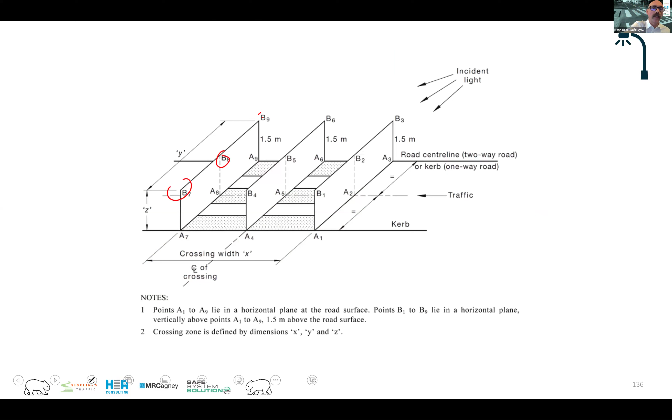So what you have to do is a lux analysis. There's software you can do it with, and you're really trying to ensure that you get that lighting across these planes, and it comes from both sides. You'll see back there a decent diagram, that's kind of your ideal.

Now, lighting used to be one of the huge challenges and costs associated with raised crossings, often around power supply. I'm really excited by some of the work Geelong City Council has been doing, and now others are following, associated with solar-powered lighting at crossings, and it's a bit of a game changer in one sense. Piggybacking on existing lighting is often good. It can sometimes factor into exactly where you'll position a crossing, although desire line should be a real big driver of where you're positioning a crossing.

We've got this really detailed design course for raised crossings with my colleague Jonathan Gordon, who's your real hardcore Microstation civil designer. He delves into a bit of this, positioning and civil infrastructure and services and drainage, in those really hard details. I'm just making sure you're aware of the principles around lighting and drainage.

And for shared paths, you want to think about again our A's and C's, starting with ensuring that we have that lighting back there. But the C is not as important because the lights are on for the vehicle. So the cyclist approaching is aware that there's a car coming.

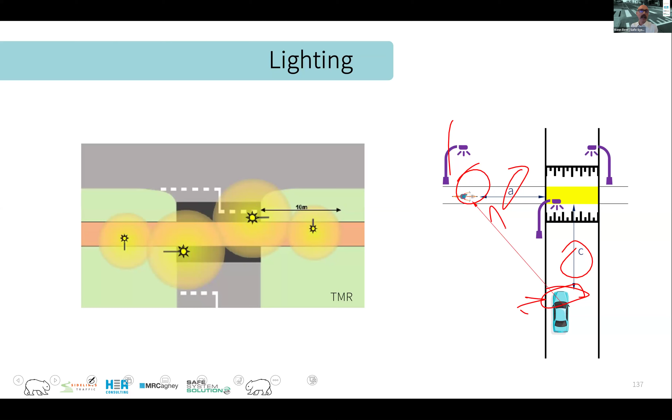Drainage, another one that makes designers shudder around raised crossings, thinking of how we manage this water that is going to arrive. We've got essentially 5 choices on how to manage water with raised crossings. I've got 6 pictures there. Keeping the kerb and channel just running through like this one, I put a red cross next to. That certainly doesn't meet Bridget's, what is it?

Smooth, step-free, obvious. What's the other S for? Smooth, obvious, step-free. Is that right? Anyway, I have to go back to look. Safe, of course. Give Natalie a prize. Safe, yeah. It goes without saying for me, but no, good. Safe, obvious, and step-free, smooth. Not meeting that, so let's not do that.

Okay, low ramp height. So that may be a determination that you can actually flow your water over it with a shallow ramp height and just accept that that's almost like a natural deviation in the road that you don't take. Positioning at the high point is going to be a beauty. If you happen to be lucky enough that the high point of the road is a desire line, your water's just going to naturally flow off it.

You don't need to worry about that at all. Now, sometimes if you were in actual greenfield subdivision style design, that may be something you consider. I don't know if anybody has actually made that an initial starting point, but I'd love to see some of that going on.

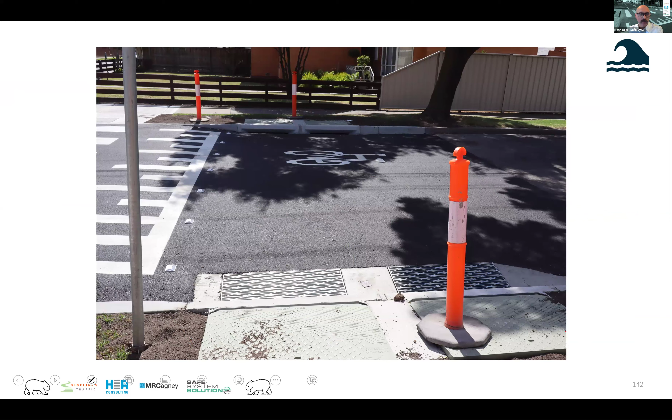You may need to increase capacity of that, as they're doing in this location. Okay, so here's some examples, and the box drain style thing. You want to start to be thinking about maintenance of it, leaf litter, and the like. That certainly builds up in there. Some of these wider ones work pretty good, and you can see that nice continuous

step-free arrangement with the TGSIs and the like there, one from New South Wales down the bottom, and another one here from Victoria. But this one, even for that pre-opening audit, very recently built, has already clogged with debris and leaf litter and the like. So it's something you want to be cautious and conscious of. Certainly making this a bit wider, accounting for some of that, would have helped, along with giving it regular maintenance clean outs.

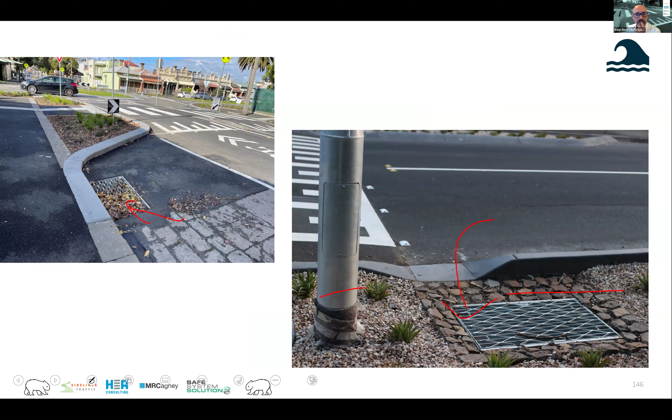Interesting one here as well. They've been able to use a bit of water sensitive urban design style thinking, having water coming in and areas where it can flood a little bit, and they can put planting and the like in those areas, but use it as that bit of a basin. And here's another one which is going into the pipe system on the approach there. That's a bit more of that water sensitive urban design cut in.

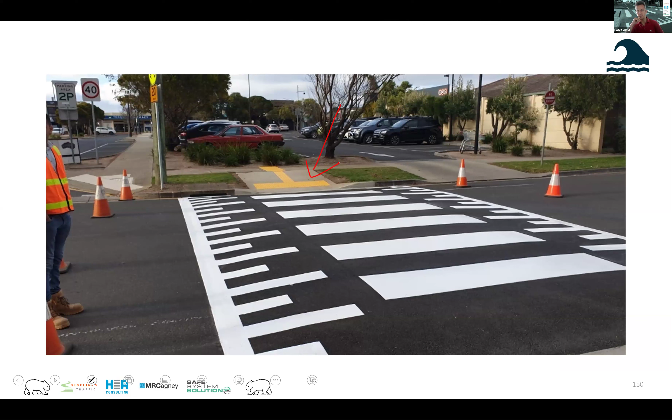Now, it gets me into this real conundrum, and I don't have the best answers for it. Like, if we can get another 3 raised pedestrian crossings in at the cost of making this one with pit and pipe and the like, I want 3 more raised pedestrian crossings, right? But I'm absolutely not saying that this is not something we really need to consider strongly. I think there's elegant designs that can meet both, and we should be looking every time we can to try to adjust that.

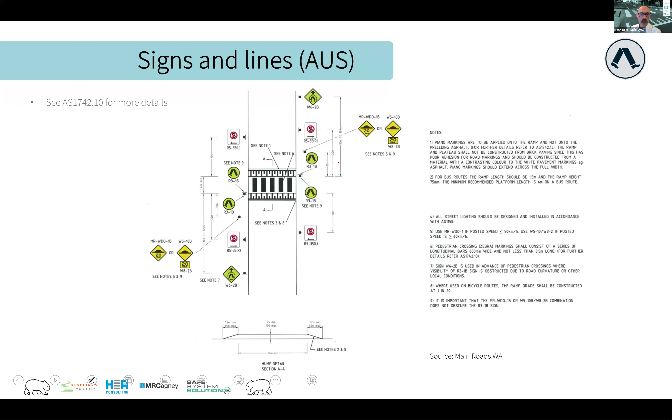You want to think, don't have your signs too low that people are going to hit their head on them. 2 meters high is the usual associated with that. And if you've got anywhere where vehicles might turn onto a crossing and not quite see it from that perspective, you want to provide those advance warning signs.

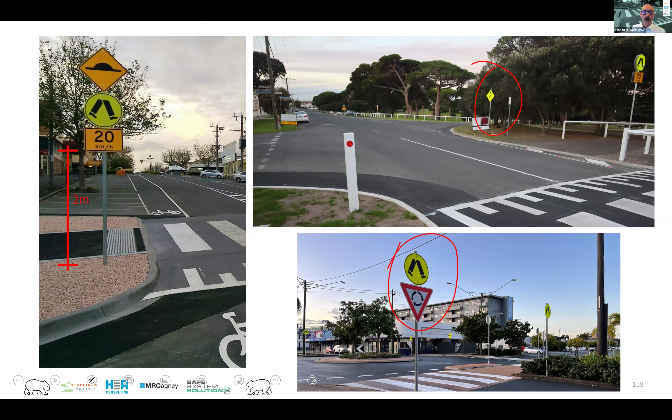Interesting one here, which I'm okay with. Some people get very angry at this. My colleague Tuan gets angry at this because two regulatory signs on the one post is a no-no under very strict standards. I think it's such a low-speed environment, it's doing the job, that I'm not as concerned about that.

Now we have quite the sign set up, don't we, here? I'm lobbying or trying to push for some jurisdictions to trial something that gets us a few less signs, because I think the sign clutter on the approach to raised crossings is a bit extreme. In some cases, it's probably far more than it needs to be. Have a look at that.

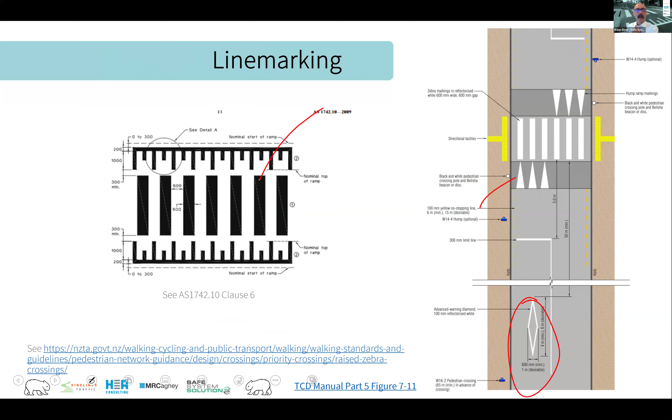If you're in New Zealand, you might use the diamond on the approach as well, and use a slightly different line marking configuration as opposed to the Australian piano key markings that we use under 1742. The New Zealanders also don't use the walking legs, they use this thing, and a slightly different warning sign if you're in New Zealand.

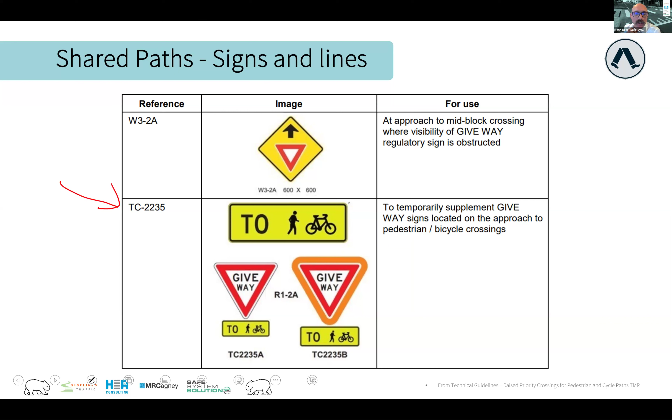Until the Australian standard comes out with this sign, which is either out or about to come out, you can have a look at the Queensland one, and other jurisdictions are just using that as the standard one anyway. I've popped some more references in there to make your life easy: tactile ground surface indicators, RRPMs, flashing lights for some jurisdictions, which I won't go into the details of. You just lay them out as per the standard.

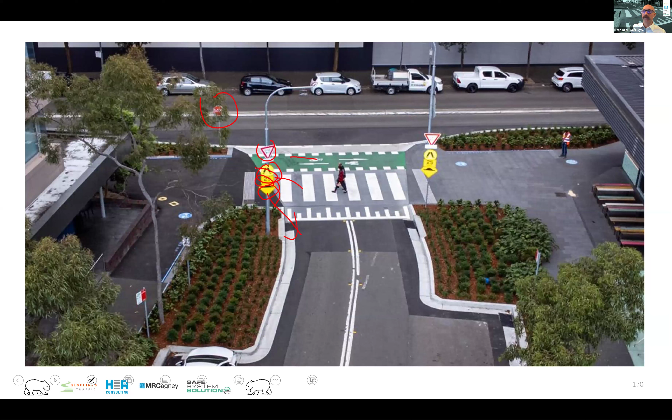I don't have enough pavement knowledge, I get pavement people to help me with this, but those are areas you need to think about: the braking zone on the approach to the crossing, ensuring your pavement strength is there, the boxing, and then your raised bit. The concrete is good at getting that sharp point. Some of the construction people are really good at that with asphalt as well. The concrete is a bit more expensive, it takes a bit longer to actually build, but becomes pretty nice.

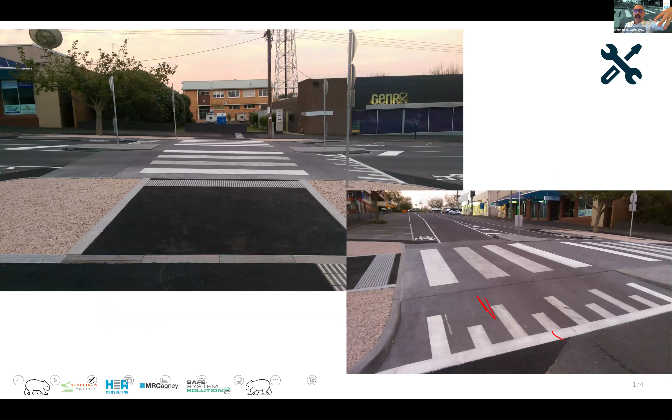Coloring your concrete a bit is better because white lines on white concrete don't stand out too much, but a bit of a darker colored concrete then gives that nice contrast. So something to think about.